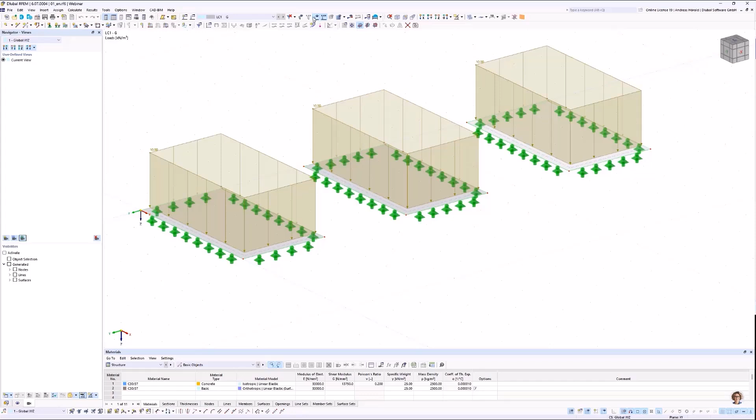So we have the same surfaces, the same loads to compare the results later. So let's double click on that surface. As I mentioned already, standard stiffness type, uniform thickness, and an isotropic material. So then let's double click on that surface where the stiffness type standard is defined. The thickness is shape orthotropy, and the material is isotropic. Let's click the edit button for the thickness with material.

You can see for the thickness type, the shape orthotropy was selected. So let's go to this dialog where 200 millimeters is entered for the effective thickness for X direction. That should be the direction where the load transfer should be, and for the secondary direction a small value is defined. You can't enter 0 here. It's not possible to calculate it. There are numerical problems.

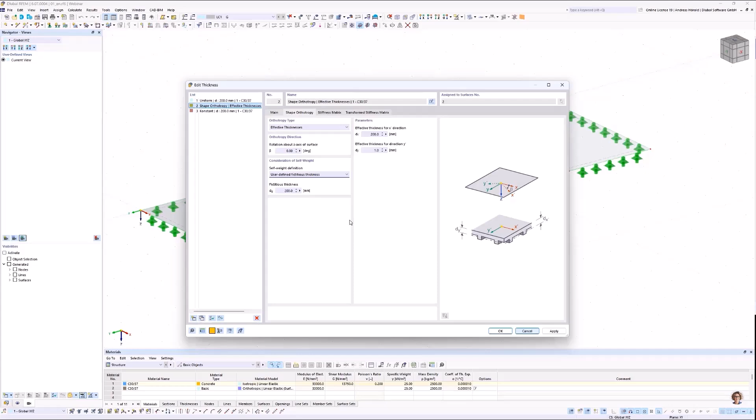Important hint for the self-weight definition: there are different possibilities. You can select determined from parameters. Then an average is calculated here. That's not what we want. And there is also user-defined self-weight, where you can enter the self-weight in kilogram per square meter. We use the middle option, the thickness 200 millimeters. Okay, then we can leave the dialog and select the plate on the right side.

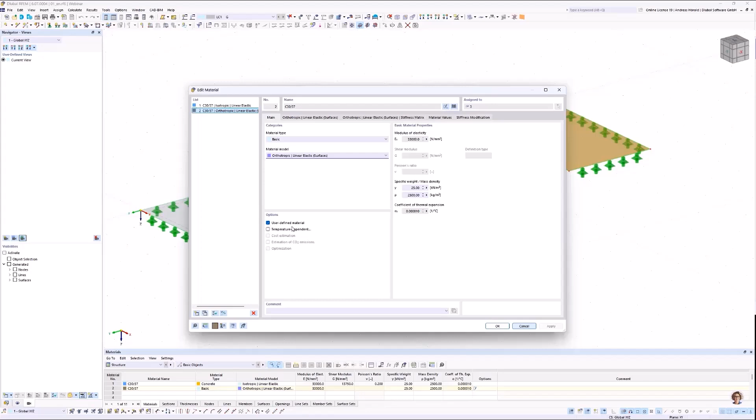Stiffness type standard, constant thickness, but we have defined a material of thickness orthotropic. Let's take a look at it with the edit button. You can see that the orthotropic material model was defined and the user-defined material is checked. So let's go to this dialog, orthotropic linear elastic surface. And you can see that there are different moduli of elasticity for the different directions.

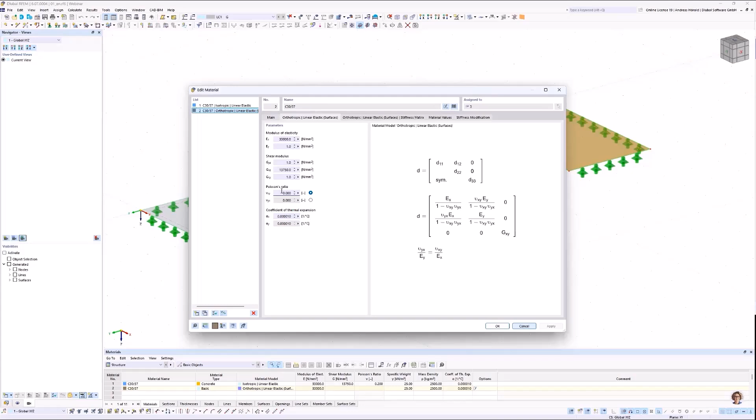For a uniaxial load transfer, you need to change the modulus of elasticity of the secondary load direction by entering a very small value. You also need to specify a very small value for the shear moduli in the secondary support directions. And the Poisson's ratio can be set to 0. So let's leave the dialog. So we calculate all, and you can see the different results.

For example, the basic internal force mx, where you can see for the orthotropic models the highest value for mx in the middle of the plates. And there are very small support reactions for the secondary directions. For the standard plate, the highest values are on the longer sides, and for these models on the shorter side, the values are not 0, because of the FEM, but they are very small. For my, you can see very small values, and that's the reason for the small support reactions.

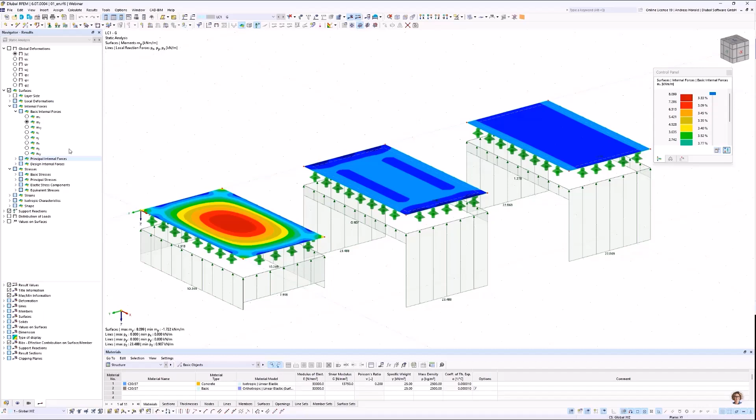If I click on mxy, you can see there's a high torsional stiffness for the standard surface, but not for the orthotropic surfaces. Okay, that should be all for the first question and the first model. We turn to the next model.

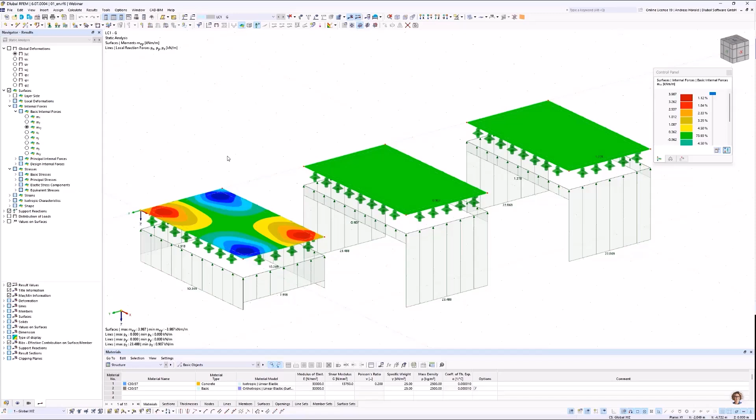The next question is, how can I quickly create a surface model from any cross section? Okay, that's a typical cross section that was imported from the library, U200. Let's go to the edit button and the library.

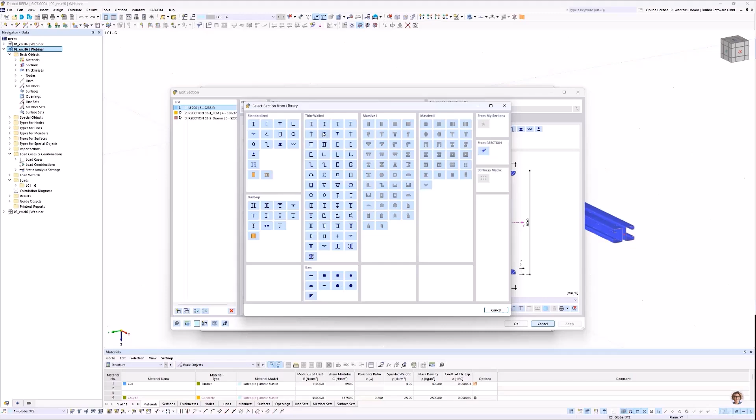A hint: you can't create surface models from massive cross-sections, but for thin-walled, standardized, and built-up sections, where you can see that different surfaces should be possible for the flange and the web, and so on. So let's try it.

With a right click, the context menu is opened, members, and then at the bottom, generate surfaces from members. And then you can see the web is now a surface, and also the flange. And the thickness of the flange is 11.5 millimeters. That's the average from the original member or original cross section.

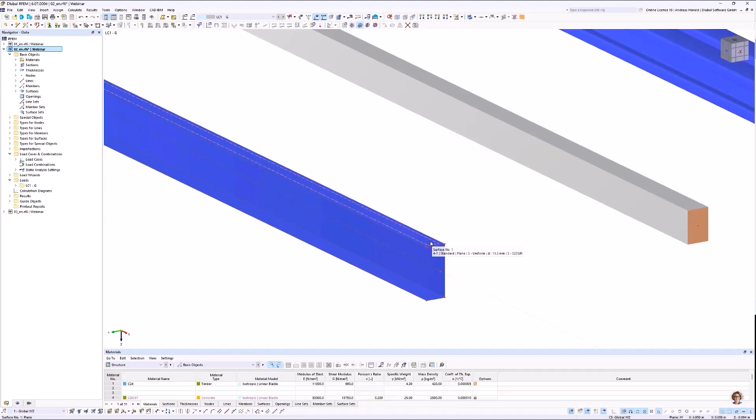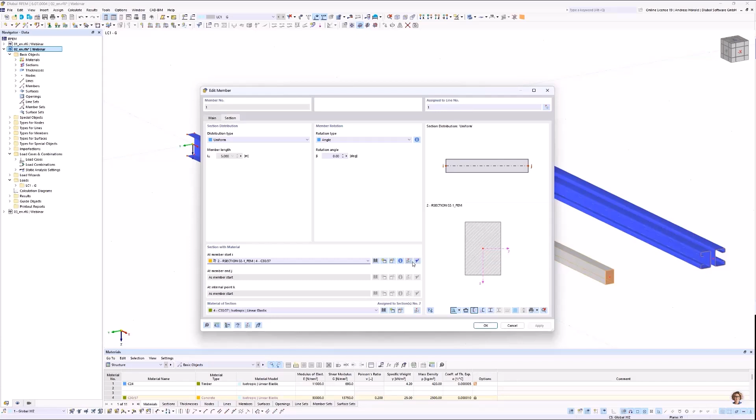So, as I already mentioned, it's not possible to do it for such members. I double click on it anyway. That cross section was defined in RSECTION. You can go directly to RSECTION with that button. So let's go left above to the base data. You can see the analysis method, finite element analysis, is checked.

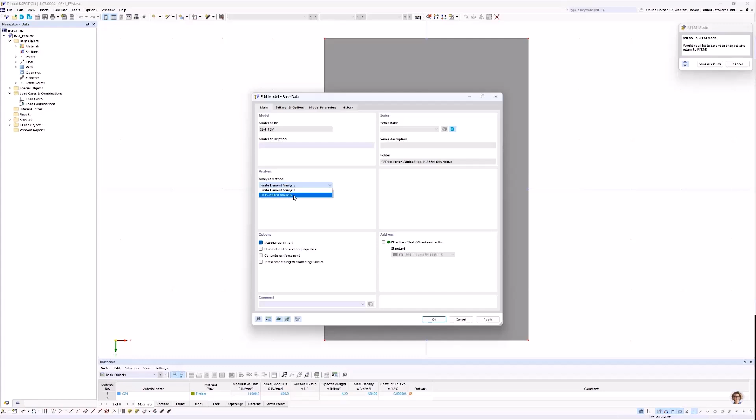And for those cross sections, it's not possible to create a surface model in RFEM, but for thin-walled analysis it is. That's the other example. We try it for this one anyway. Right click, members, and you can see the option is grayed out. So I double click on the member on the right side. Section, also a section that was created in RSECTION.

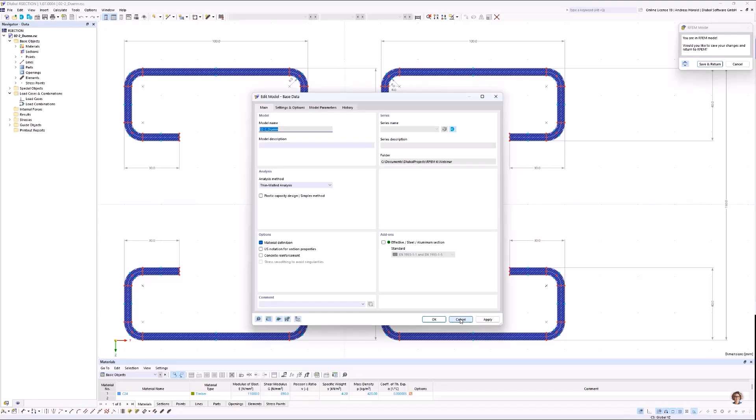I press the button again to turn to RSECTION. So I turn to the base data again, left above, and you can see thin-walled analysis is checked. Okay, and also parts and elements must be defined. So, and then you can create a surface model. It's a quite new option.

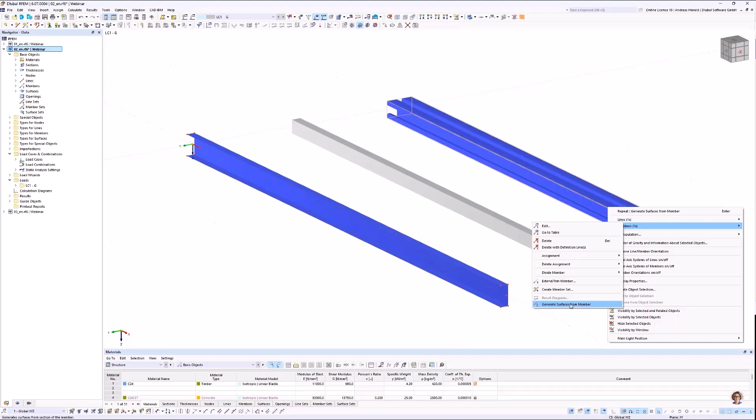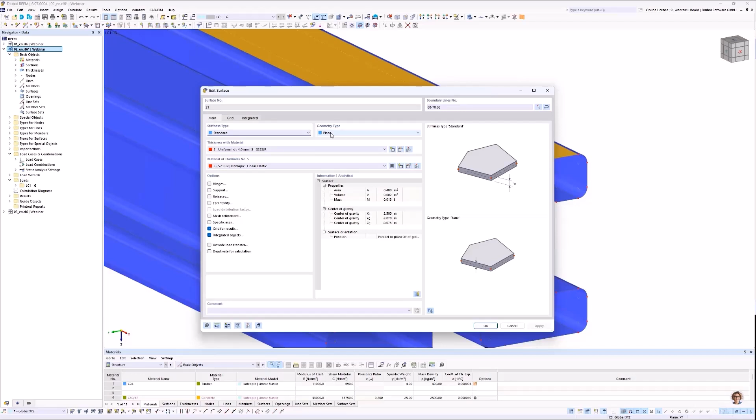So right click, members, and generate surfaces from member. And now you can see it is divided, a surface model is created. Thickness 4 millimeters, geometry type plane, and for the roundings, let's double click on one. Thickness 4 millimeters, but the geometry type is quadrangle. Okay, that should be all for this question. We turn to the third question.

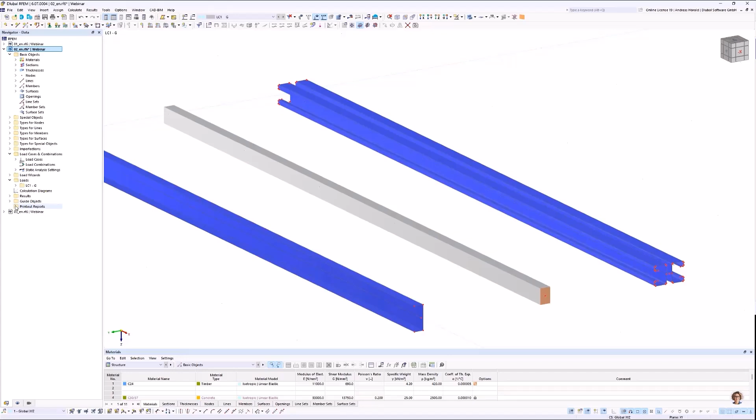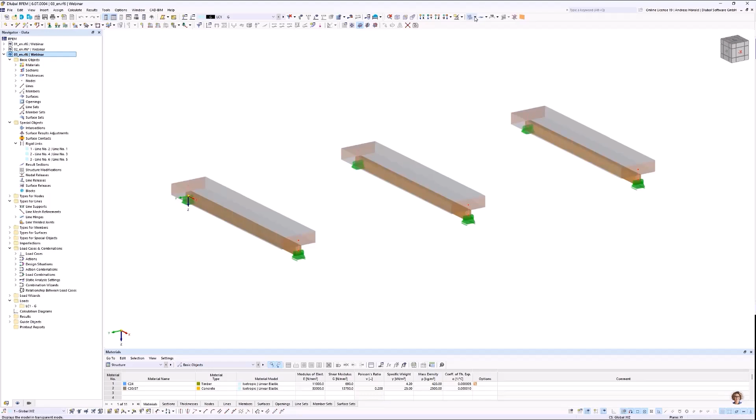The third question is, how can I elastically couple elements? There are different possibilities. For example, line releases are possible, or line hinges, in the case where members and surfaces are connected in the same line. But for this example, I show it on the wireframe model.

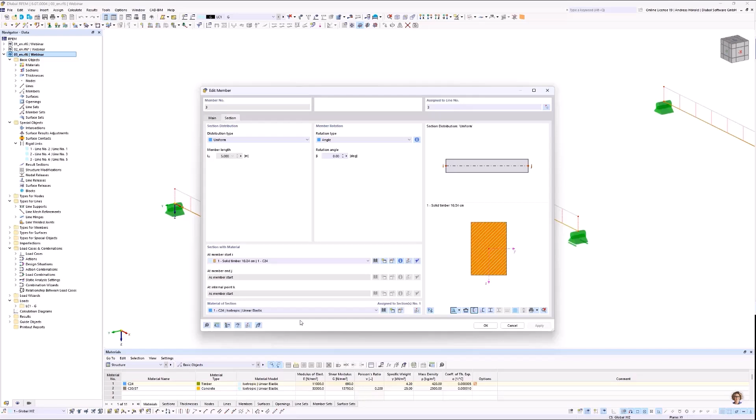We have two members without any eccentricity. The center of the member is in the middle of the member. This is a member of 1 meter width, and the thickness is 300 millimeters concrete, and the member below is a solid member of timber. This is valid for all three members.

But there are different rigid links defined. That's the possibility that I would like to introduce. You can see the rigid links in the navigator data on the left side. There are 3 rigid links defined. To create a new rigid link, you can do a right click on it, then new rigid link.

I double click on the first rigid link. You can see there's no line hinge defined. That means the connection is absolutely rigid. So then I double click in the middle. So you can see a line hinge is created. I press the edit button.

In longitudinal direction, in X direction, there is a very high spring constant. In the Y direction and around the X axis, there are small spring constants. Spring constants are created so that you can calculate a model that isn't unstable. So then we double click on that rigid link. Also a line hinge is created with a small spring constant in longitudinal direction.

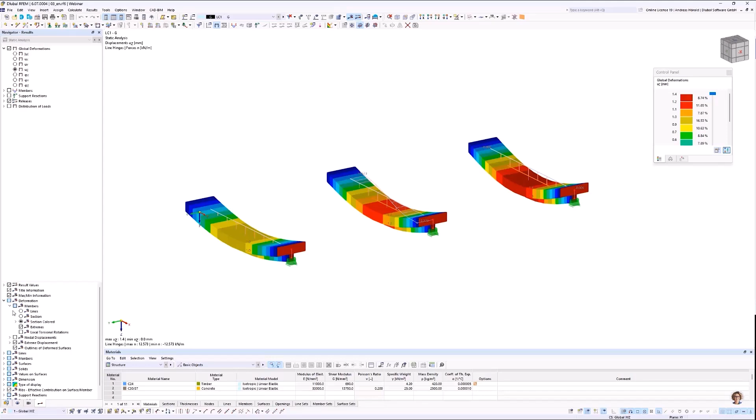So let's take a look at the different results. I show again the load, the same load, and then the results. To display it a little bit better, I turn to the navigator results, and for the deformation, I check lines. I switch off the releases. You can see the different deformations. The smallest deformation is on the left side, for the rigid link without any line releases or line hinges.

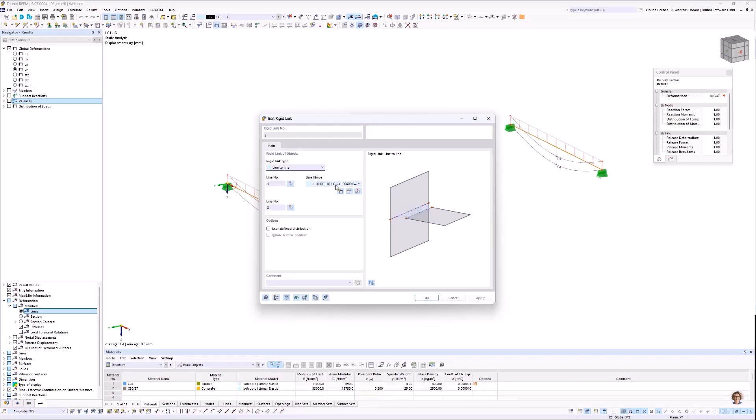So, higher deformation for the rigid link with the line hinge with the high spring constant. I can see it again. And the highest deformation with the rigid link with the smaller spring constant in longitudinal direction. So let's take a look at the releases.

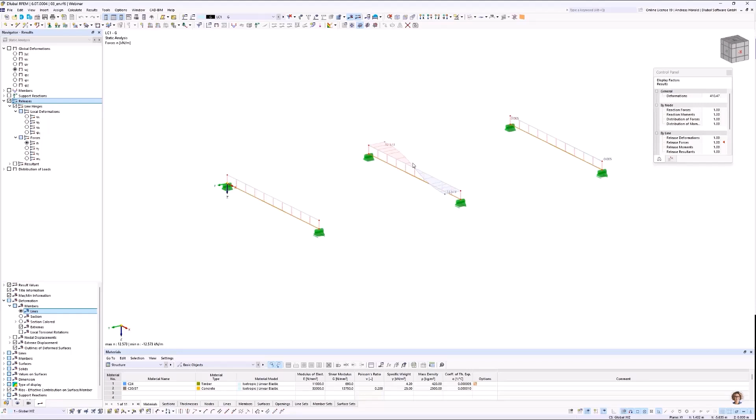The normal forces in the longitudinal direction are 0 for the rigid link. We've got quite high values for the rigid link with the higher spring constant and a very small value for the rigid link with the smaller spring constant in longitudinal direction. It's usual to have this normal force between the members for a composite beam. That's usually shear force affine.

I switch on the shear forces VZ. Now you can see the force in longitudinal direction is shear force affine. Okay, that should be all for that question.

Stefan, I hand over. You can continue.

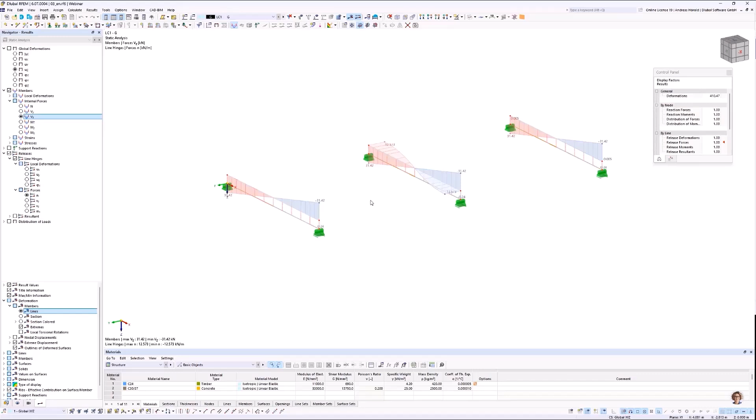Thank you, Andreas. I will continue with the next topic.

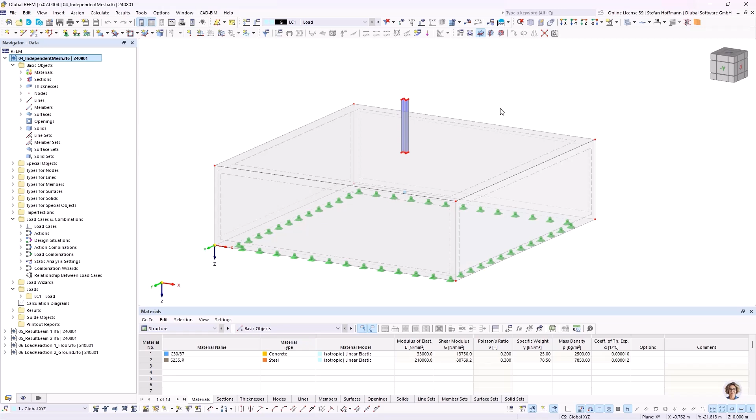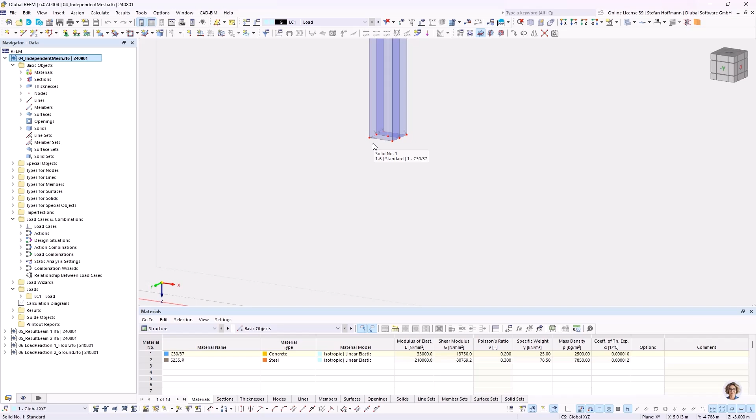The next question is, can I generate the FE mesh of two or multiple objects independently? This arises usually if you have a big solid representing the ground, and then a girder or beam connecting to it, represented by surfaces. A fine mesh of these thinner surfaces next to the solid is needed because we propose the solid mesh should be at least 4 up to 8 elements per thickness, possibly even finer. If you have a fine mesh connecting to the solid body, it needs to be connected at FE mesh nodes.

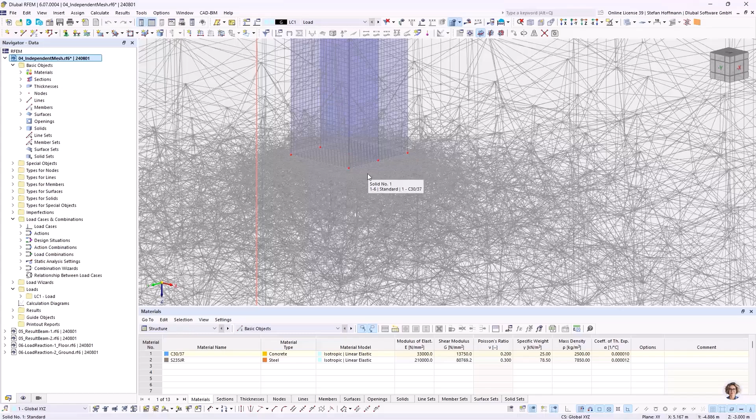If we generate the mesh without any extra settings, it will most likely produce a fine representation, because the fine mesh of the surfaces needs to be guided and directly connected to the solid ground. This leads to a high statistic of 3D elements, 47,000.

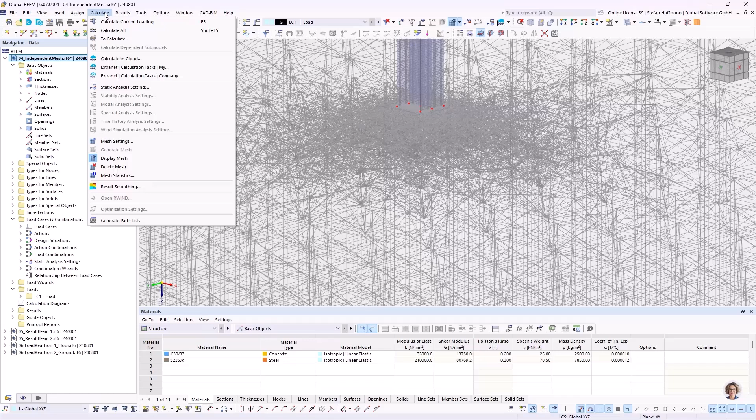The question was whether there is an option so we do not need a fine mesh of the surfaces connected to the solid. This is possible if you go into the mesh settings and check the option that the independent mesh is preferred. If you hit OK and apply, it will regenerate the mesh for you, and you can directly see that there is no need for a very fine mesh of the solid anymore.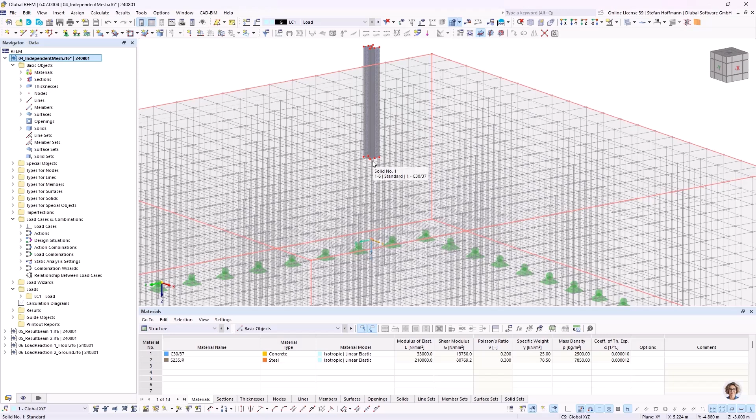The preset is 0.5 meter, and you can see that the statistics will lower from 47,000 to 2,400 elements. This is a lot quicker in the calculation, and it also gives you the chance to have a better sorted mesh of the solid.

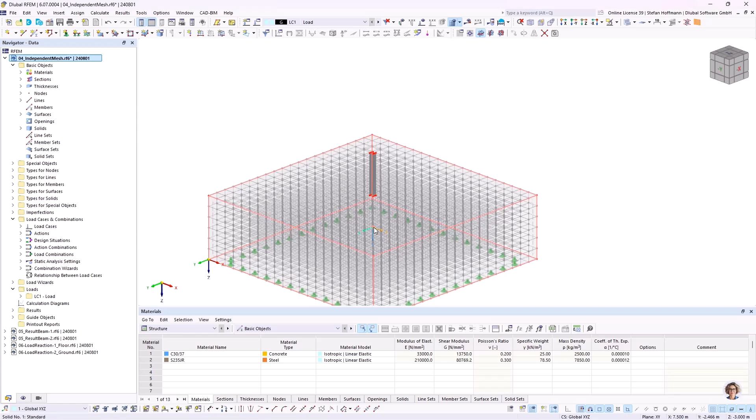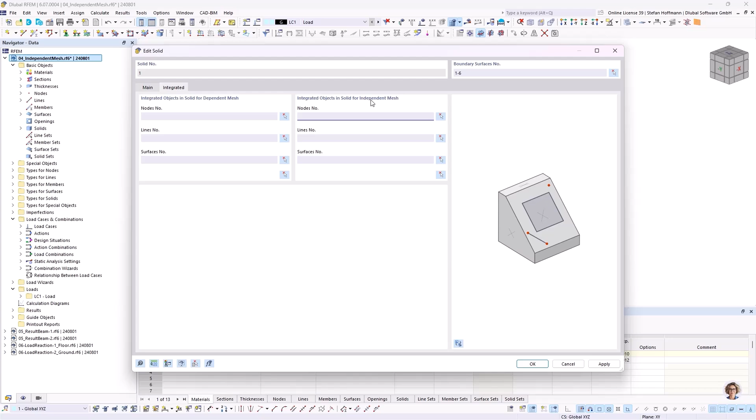There's also another setting you can do. If you double click on the solid, you can check integrated objects. In the tab of the integrated objects, you can decide which objects should be integrated for a dependent mesh, as you can see in the sketch on the right, and which objects should be integrated for the independent mesh. These settings will most likely allow you to have a better optimized mesh and faster calculation times.

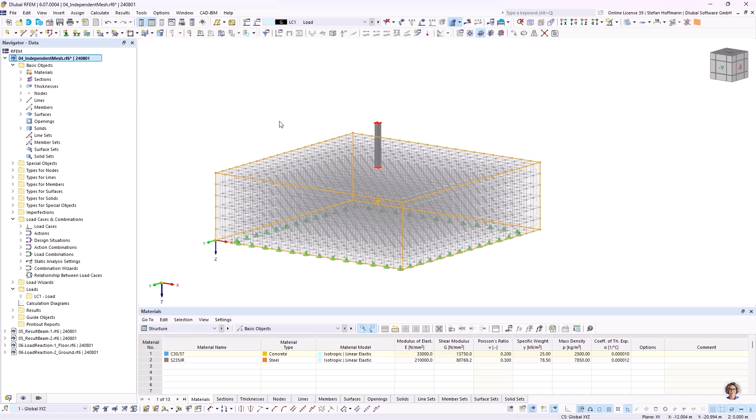And of course the forces and the objects will still be connected, with some settings in the solver distributing the forces into the connected objects, but now without the need of a shared mesh. Okay, let's go to the next example.

The next question is, what is the result beam and are there special features in its application? The result beam should already be known, usually from our customers who have used RFEM 5 in the past, but maybe you are new to RFEM 6 and are asking what the member type of the result beam is. It's a beam without any stiffness. You can assign a cross section in order to design it later on in the add-ons, but the cross section will not put any weight or any stiffness into the model, and so it allows you to sum up forces of objects.

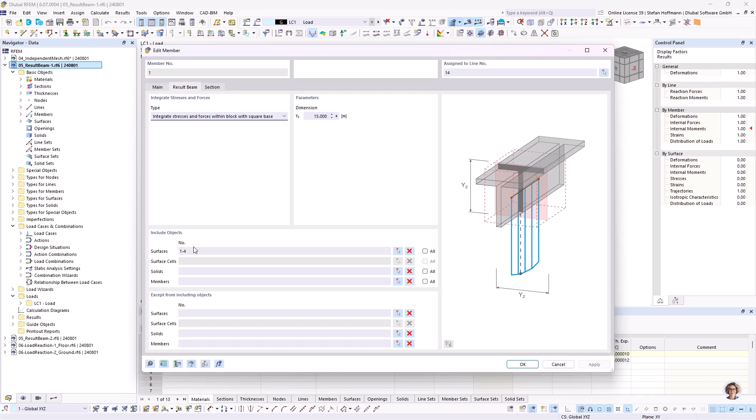If you activate the result beam, you can jump into the next tab, which allows you to define the type. There are various settings in here, which you can read about in the manual if you would like to know the specific topic. You can also define what objects you would like to include or exclude. The section, as mentioned, is mainly meant for a later design.

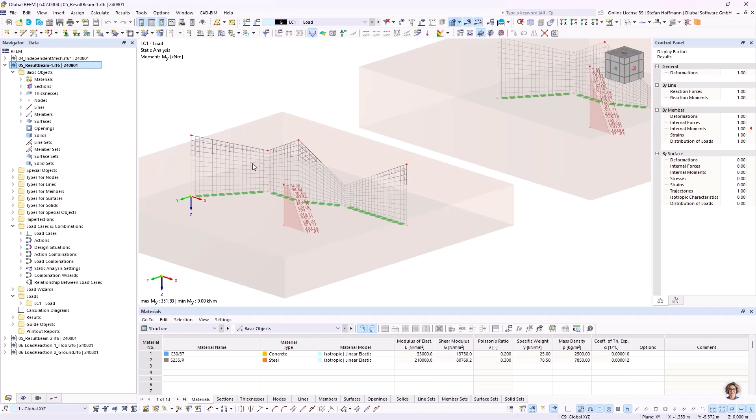In the first model, I would like to show you the effective area of the result beam. It is usually meant to be put into the center of the integrated objects for this result beam, and it is used to have a certain height. So on the left, the beam does not go to the top of all surfaces, and on the right, the beam goes to the top of all surfaces.

Regarding which forces can be integrated, it's of course only the forces in the effective area of the result beam. So if it's not long enough, you can see that the normal force, which is summed up from top to bottom, will not start with 0, but on the right it does start with 0.

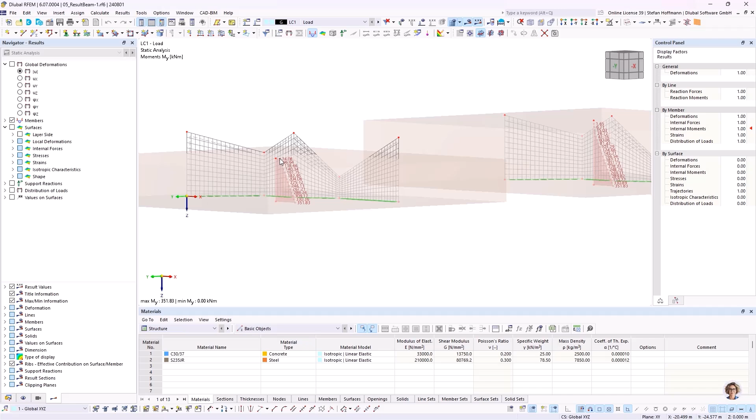It will start with a value and go up to a different value at the bottom. So if you define a result beam, you should think about how long it will be, in order to consider the effective area of the result beam. If you're curious about the integration points, you can activate this in basic objects, member parts, and then check the result beam mark, which will allow you to check member forces and deformation of certain objects.

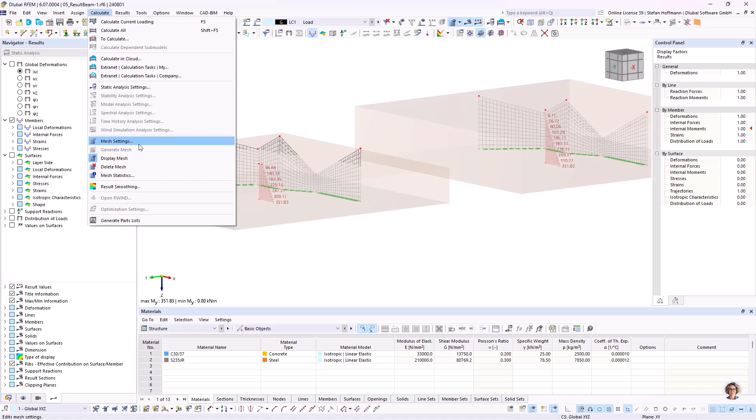If you would like to have more values, go into the mesh settings and member settings, and then you can adjust the number of divisions for result diagrams.

I have another model to present regarding the result beam position. Let's go into the next model.

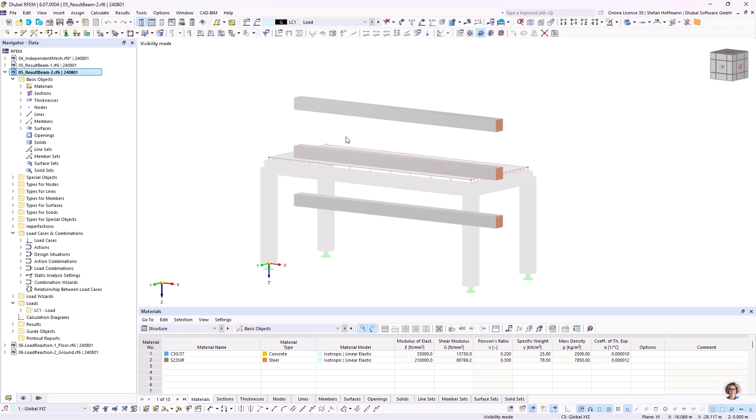It's a system of a surface laying on 4 columns with some ribs. What I'd like to show in this example is that the position of the result beam is important for the inner forces.

If you check the internal forces—normal force, shear force, and the second shear force—you can quickly see that the position of the result beam does not influence the displayed result. But if you check the moments, comparing mainly the bending moment in the strong axis, you can see that the result is influenced a lot by the position.

Why is this the case? Usually your task is to put the result beam into the centroid of the objects you're working with—the geometrical centroid. If you do so, you get a bending moment diagram that looks quite okay. This is related, of course, to whether you have line hinges at the start or not, because the beam is essentially just summing up the inner forces of the surface or objects it's taking care of, so the summed inner forces correspond with the stiffness or model behind it.

If you now move it upward or downward, there is an influence from the lever arm of the normal force on the bending moment. So if you put it higher, you can see the MY diagram will be influenced a lot. Same goes if you put it lower, because the normal force will then be multiplied with the lever arm and increase your inner forces.

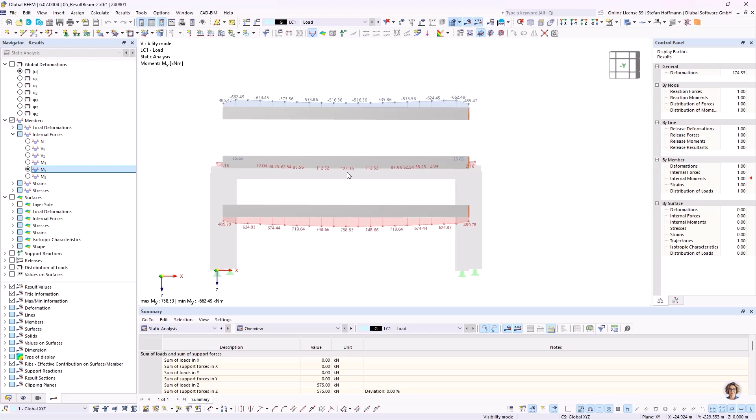So please take care when using the result beam, and if you want to evaluate the forces, make sure you put it in the correct position.

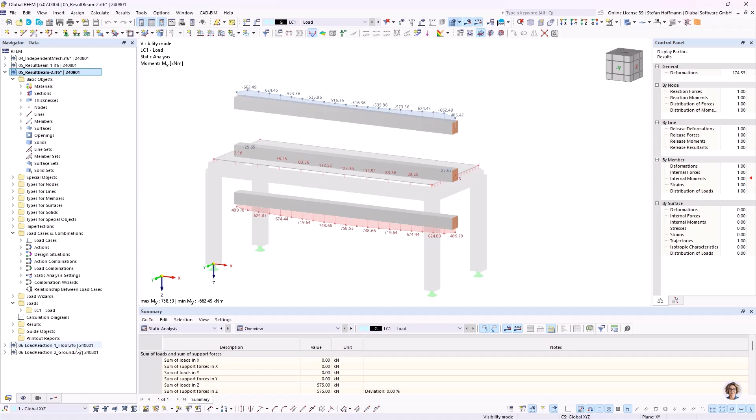Last but not least, the last question for today's webinar is: how can I transfer support loads to another model? I have two models—one which is a floor above ground, and one which is the ground model. Usually, depending on what you want to achieve, you simply split your structure into different files.

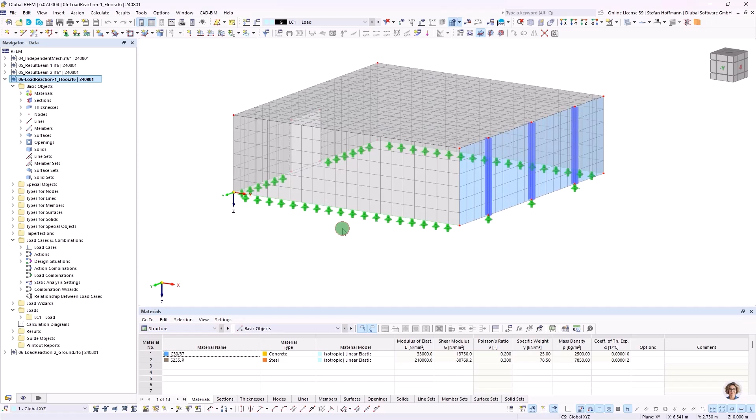And of course, you'd like to forward the support reactions you receive at the top of your building into the bottom part. This was already possible, but we've now improved the functionality so you can also use the function we already provided in RFEM 5, to create so-called free loads. What does this mean?

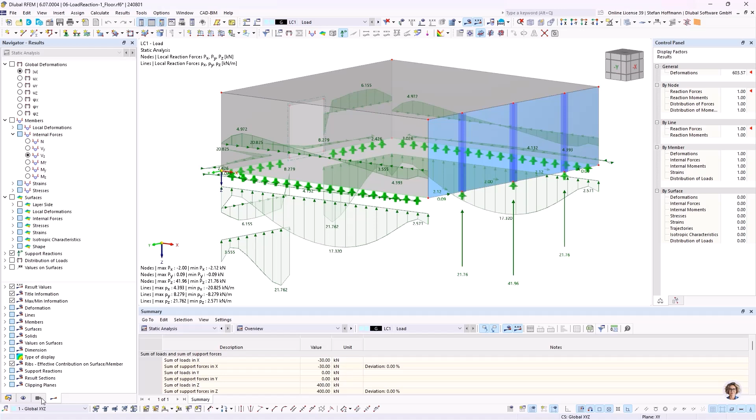Please take care that if you duplicate the file, you use File Save As under a different name, because copying and pasting in Windows Explorer will not generate a unique model ID, which is necessary since there's an improvement where the models are linked to each other—and this can only be done with the unique model ID.

So if you check this bottom file, you can see I already created a support reaction. I connected the model of the floor, which is in the same project folder, with a unique ID, and then specified that I'd like to transfer 3 loads.

So this was added to the drop-down menu list so that you do not have to assign the node numbers and lines manually.

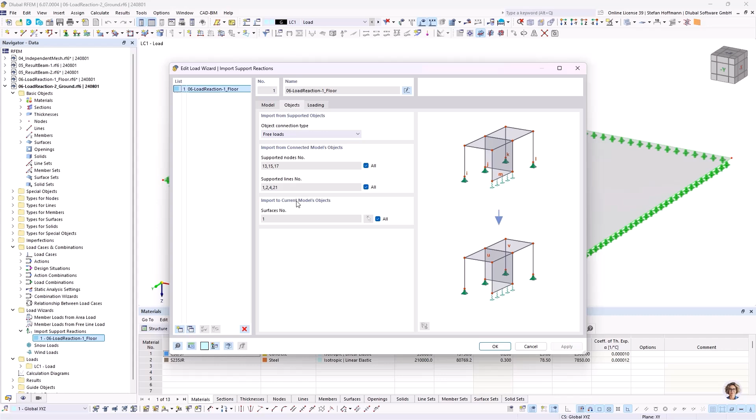Now you are most likely free and only bound to the geometry, and since it is now only geometrically projected into a certain direction, you should think about also defining the surfaces where you would like to import the forces. So just imagine if you have a floor laying here and also define a second surface, all these forces will penetrate into the global Z direction, whatever they can penetrate, and this may double the load if you have the same surface down below.

So you would have to think that if the construct of the part is only standing on one surface, you have to disable the all check and assign these loads to the corresponding surface. If you only have one plane in each model, you do not have to think about it, because then only the surface will be touched.

And the last part, you can also then define only the varying distribution now, but you can tell that the connection should be manual. So you could create your own assignment to an existing load case, or do it automatically. And usually, most times using this function, only the Z direction will be imported.

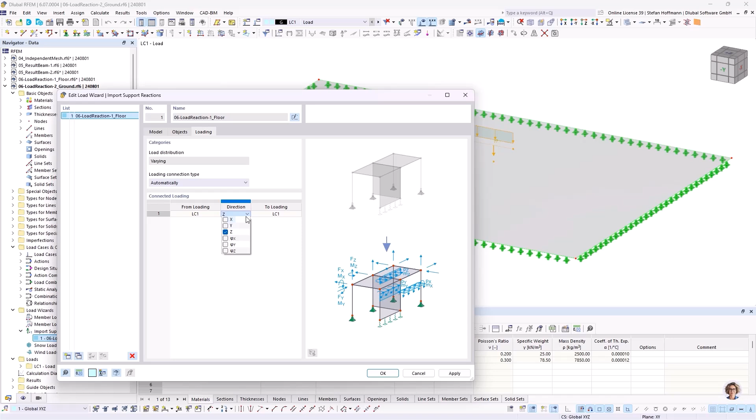So we will do it as follows. The question marks will begin if you hit F5, for example, to start the calculation. It will start the calculation of the so-called mother file, the floor. And once we achieve these results, it will transfer them into our file and then also do the static calculation in our file in order to receive the results.

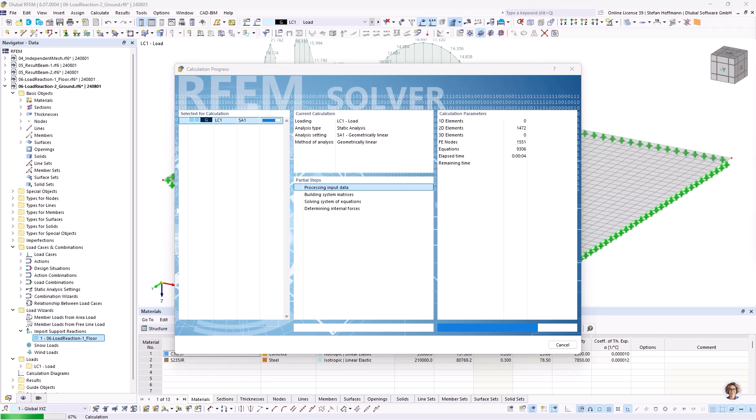So once we have the results, you can quickly see, if we just don't display them, that we now have the forces being put into our ground model. So where the door is, there's nothing, and only our column forces are being introduced.

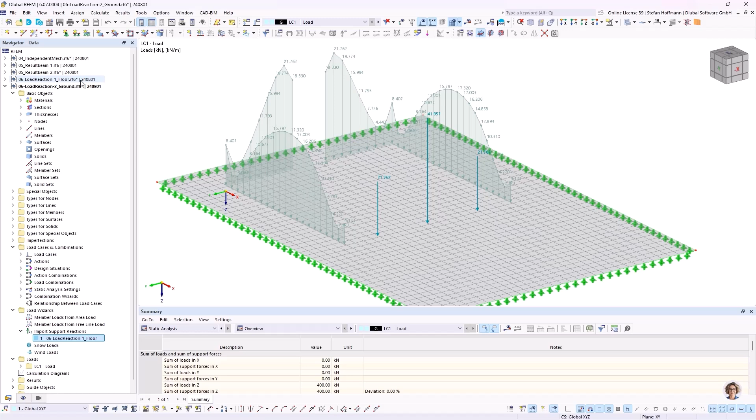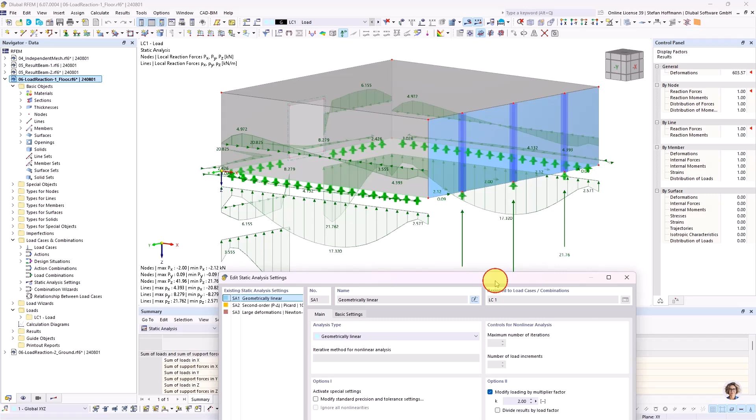Now the highest functionality increase, I think, once we have these loads, is that once you go into the floor and, for example, double the forces, which can be done in the static analysis settings. I've already introduced this, and now we will just lower it by half. So if we now do not modify it, let's have a look: 42 kilonewton into the Z direction.

If we disable it and hit F5, you always have to think about that this model was not yet saved, so there's nothing told to the floor below. And once we hit save, there should be a warning that the results will be deleted.

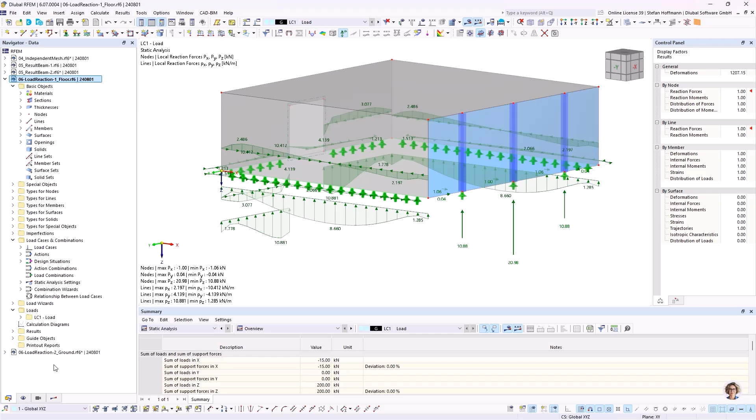This is the question for the connected ground model, because now we told the program the new file has only 1 times loads. And if we jump into the ground model, you can see there are question marks again, because it is now known to the link that the forces have changed. So we need to recalculate it once again. It will start the floor model in the background again, and calculate the new values.

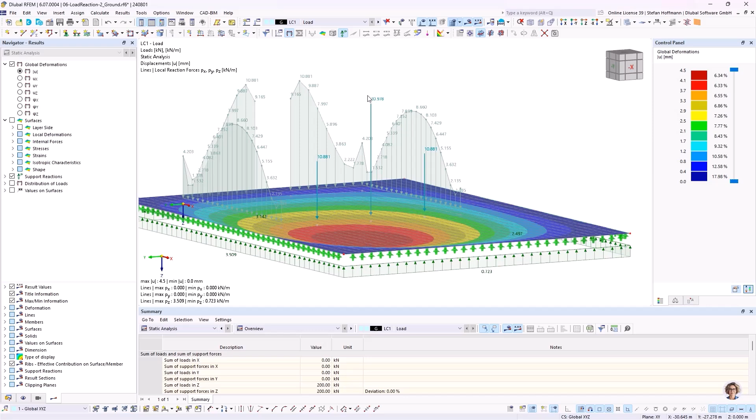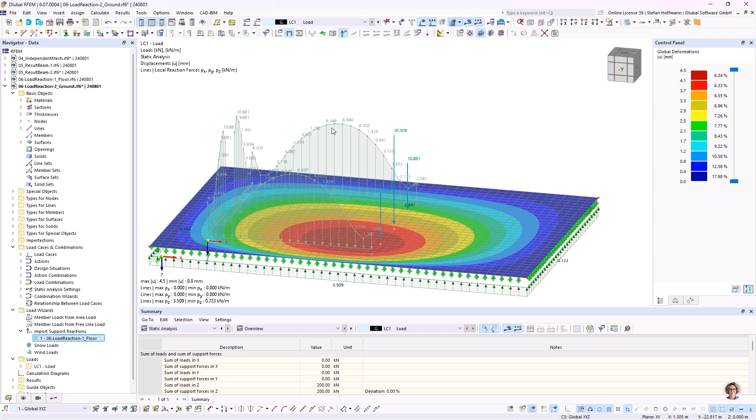So with this new possibility, it's most likely closing a gap to RFEM 5, but with the bigger advantage that you now have the link to the connected file, and if you change this file, the forces will be updated automatically. If you would not like to do that, you should be able to disconnect the generated loads from the support reaction, and also disconnect the single loads, and then the connection will be gone. But usually, depending on how you would like to design, it's a main advantage.

All right, so I am done, and I will hand back to Andreas. Thank you for your presentation, Stefan.